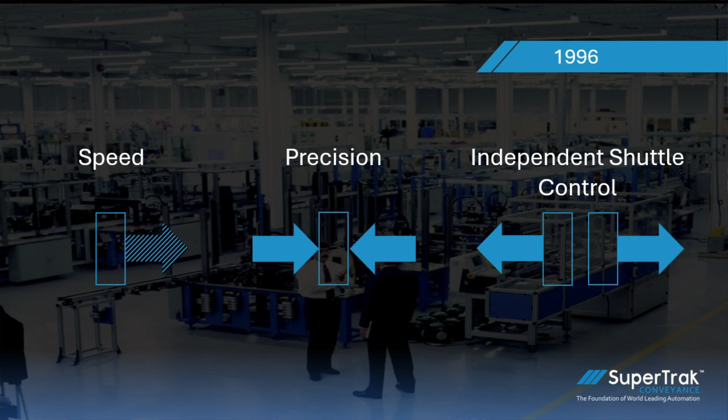And if we could have independent control over each shuttle, basically controlling its destination, its velocity, and its acceleration, that would open up immense possibility for machine designers. At the time, we started looking at what was available on the market.

And if you look at something like an indexing dial, with an indexing dial, you get speed and precision, but you sacrifice independent shuttle control. With something like a pallet conveyor, you get independent shuttle control, but you sacrifice speed and precision. And those solutions are good for lots of applications, but the more complex an application gets, and the more widespread that application gets, it starts to become a burden on machine designers.

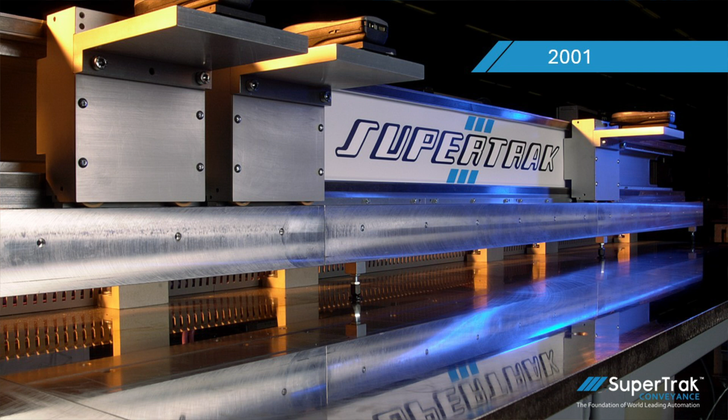So we started to develop a solution. And this is where SuperTrak begins. In 2001, at the Motek show in Stuttgart, for the very first time, we exhibited SuperTrak Conveyance. And this was our show cell. And we were demonstrating how speed, precision, and independent shuttle control can make machines smaller by limiting the amount of tooling and robotics that you need in order to get to a high performance level.

This particular show cell was demonstrating the assembly steps of these very high-tech looking mobile phones that you can see on those shuttles. And a lot of us here remember the days when you would make a call on a mobile phone, you had to pull the antenna out. And that seems like a very long time ago, to me anyway. And it really just showcases how much time, learning, and experience has gone into SuperTrak Conveyance.

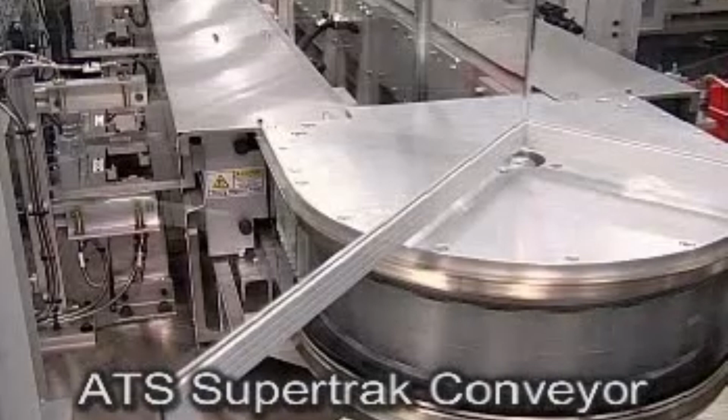In 2002, we released Generation 1 of SuperTrak. And this was one of the very first applications that we did. This was for an automotive components manufacturer. And it was assembling an actuator mechanism. And again, we showed speed, precision, and independent shuttle control can really make a big impact on automation design.

But that's not all automation needs. Manufacturing is dirty. Manufacturing is constant. It's 24 hours, 7 days a week. Manufacturing requires high performance and high quality. And at the end of the day, it needs to run, and it needs to run well.

So we learned a lot about power electronics, about PLC interfaces, about materials for wheels, materials for wear strips. And we also recognized that there were a lot of general improvements we could make to the design. So almost immediately, we started working on the next generation.

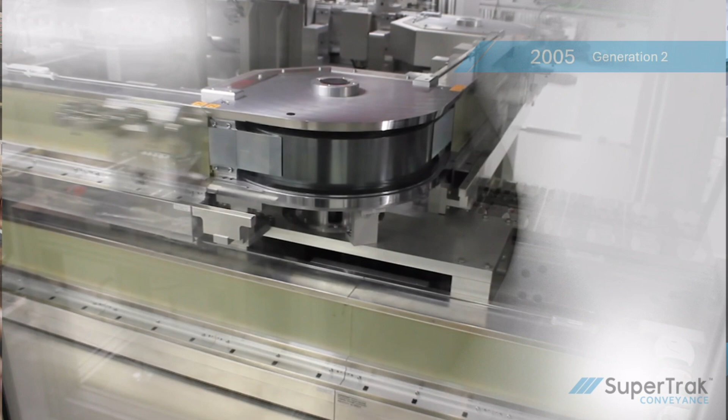In 2005, we released Generation 2. And here we had an improved mechanical configuration, so it was easier to assemble. It was easier to do repair and maintenance. We improved our electronics. That gave us more performance. It gave us a better PLC interface. It gave us more bandwidth on our internal communication channel.

We also recognized that we needed to build more into the software. So our TrakMaster software needed to be more than a simple configuration tool. It needed to have advanced diagnostics, and it needed to have a way to configure functionality. We found that our SuperTrak users were programming the same things over and over and over again. And rather than do that programming each time, why not make that functionality configurable? So this is where we really started to improve the product.

Generation 2 is where SuperTrak really found its legs, and it was a workhorse for us for nearly a decade. We utilized it in medical device assembly, packaging, in pharma, automotive component assembly, in solar, and in battery. But like everything, we also recognized that we could make it better.

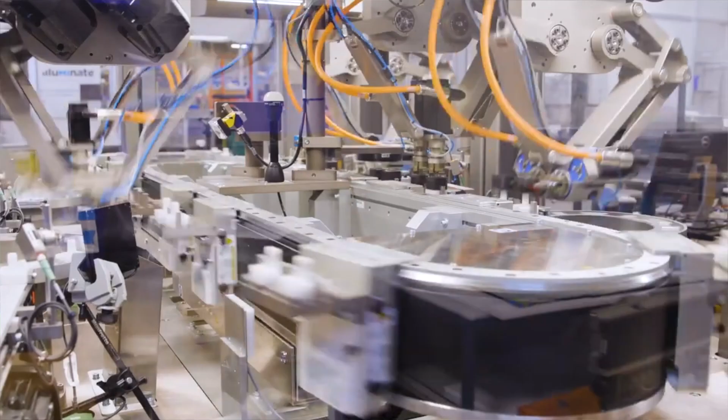In 2014, we released Generation 3, and this is when we could confidently say that SuperTrak Conveyance was an automation platform. Here we introduced a curved linear motor with a precision of plus or minus 25 microns, which meant you could actually stop and do work on the corners. We had higher acceleration and higher velocities. We had best-in-class precision on our straight sections at plus or minus 10 microns.

And we really started to improve the software. We had better simulation tools, better and easier ways to configure an advanced system, and very, very powerful diagnostics. So when things went wrong, you could get back up and running very, very quickly.

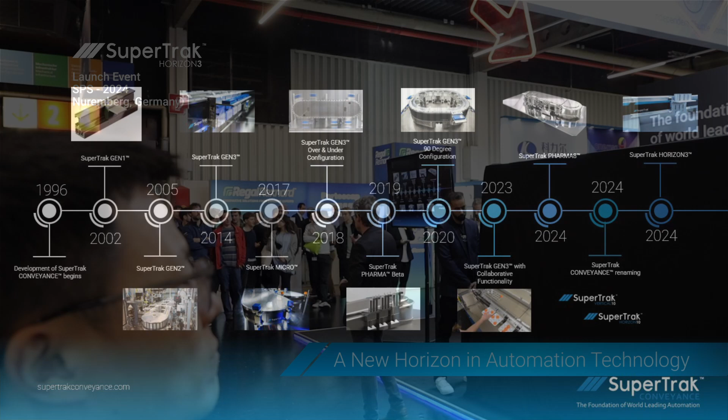From 1996 to 2024, SuperTrak went from being just an idea to an automation platform. But it was really the journey, the learning, the experience, and the time that we put into it that gives us the confidence to call it an automation platform. And since 1996, we've continued to innovate the product. We've continued to enter new markets, new industries, and new applications, looking for ways to show how speed, precision, and independent shuttle control can really make a big impact on machine design.

Today, we're going to introduce our latest product, HORIZON3. And I'm going to pass the microphone to Michael Healy, our Vice President of Products and Technology. Mike? Thank you, Ben. As Ben said, my name is Michael Healy. I'm the VP of Technology for SuperTrak, and thank you all for coming today.

I think the takeaway message from Ben, and the one that we wanted you all to have, is everything that we do here at SuperTrak is all based on a real depth of experience and knowledge. We've been doing this for a long time, and we know what we're doing. But we also know that the future ahead of us has a lot of challenges.

I'm a 24-year veteran of the custom automation business, and the challenges we've been facing in the industry over that time have been tremendous. Some of those that we've seen are the complexity of the products we're trying to manufacture on our platforms is growing. The number of devices, the size of these devices, the processes required to assemble them are more difficult. People, we don't have people to run the lines anymore. We need automation that's smarter, that can do more in less space.

We have problems with decreasing life cycles. We're building machines now while products are still being designed. They have to be agile and adaptable. Sustainability is a huge problem to a lot of people, including us. Reduction of costs. Always about reduction of cost. How do we drive cost out of the product?

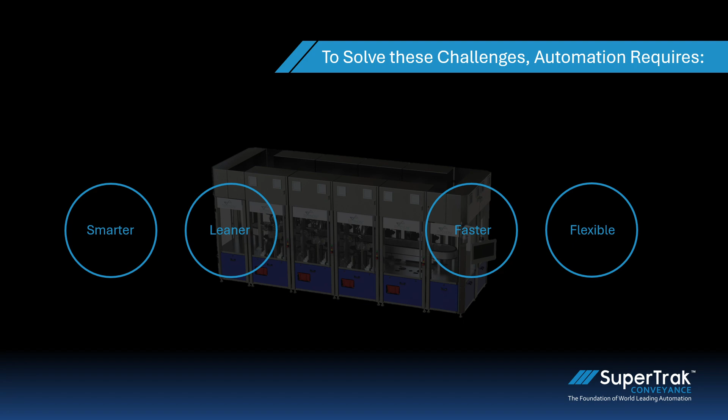Number 3, how do we move faster? How do we increase the output per square meter on the manufacturing floor? And the last one is how do we become more flexible? How do we be adaptable and agile as product and processes change?

So we here at SuperTrak reflected on those questions, and we took the 1,200 systems that Ben talked about, the 20,000 kilometers. We took 25 plus years of experience. And as a machine builder, we went out and we reviewed this with all those in the world. And what we believe is we've developed a product that lays the foundation for the factory of the future.

And I want to say it's not only on the surface of what you've seen, and I ask you to come up later and ask some questions, but the underlying technology here, we believe, won't solve just the problems of today, but will solve the problems going 10 years into the future. So without further delay, I'd like to introduce everyone to what we believe to be the most elite and world-leading platform in the world.

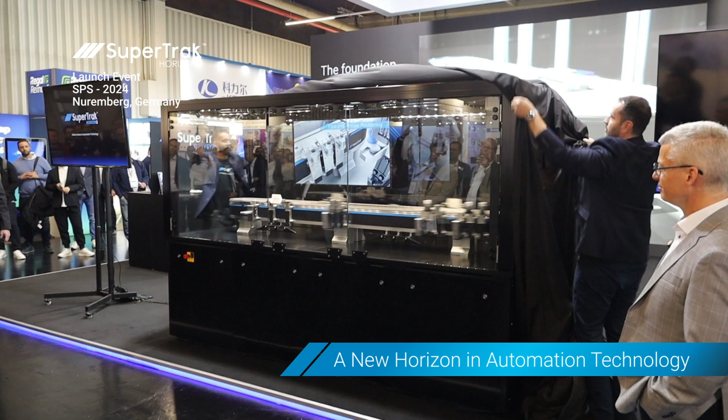So before we move on, I'm going to hand it over to Albert to give you some of the technical features of the product itself. I want to make 2 acknowledgements. First is to the development team, a lot of whom are here today looking like proud parents as we've unveiled this. Thank you for all your dedication, your hard work. This has been a year and a half in development. What they've done in a year and a half is absolutely tremendous and industry leading.

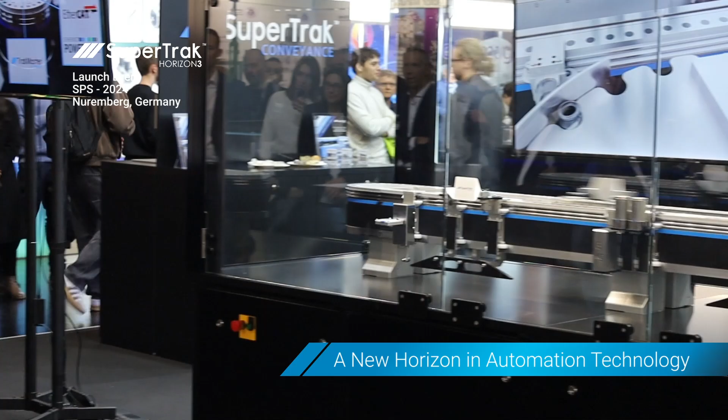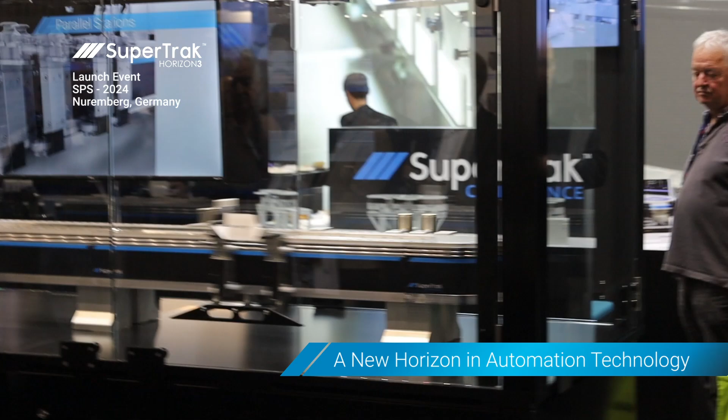And number two, I'd like to thank our early adopters of our technology, and specifically Siemens, who's here with us today to celebrate. They put a lot of effort in, and what they're doing to integrate this into their TIA framework is absolutely outstanding and world class, and I ask you all to go over to their booth and have some discussions with them too. So on that note, I'm going to hand it over to Albert to give you a bit of the technical depth. Okay.

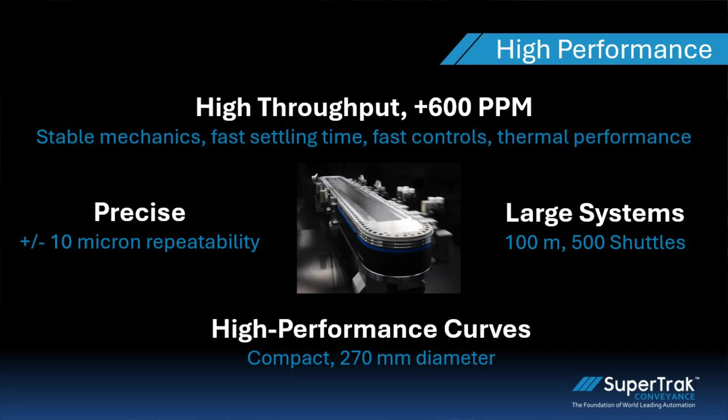And the technology, you get very high throughput with a product like the SuperTrak. And to get high throughput, you have to have very stable mechanics, you have to have very fast settling times, you have to have very good thermal performance, you have to have very fast controls. It takes a combination of a lot of things in mechatronics to really get high throughput. And at ATS, on high precision assembly machines, we push over 600 parts a minute on the SuperTrak platform.

Also very precise. You can position pallets to plus or minus 10 microns, which really lets you use this product for some very, very complex processes. The new system will also scale up to very large systems up to 100 meters of track and 500 shuttles, all on one single system. And also the new compact curve, it's only a 270 millimeter curve, but very high performance. Very good precision, very good acceleration. You know, you can really leverage that corner to do some very good processing.

Also flexibility. So the product now is a 50 millimeter pitch. Over the years, we would often put multiple parts on a shuttle, but now you can go down to one part per shuttle. So a true batch size one. Also on SuperTrak, it's a cantilever design, so you get full access to the part. Full bottom access, full access all around. So that really gives you a lot of opportunities in your automation.

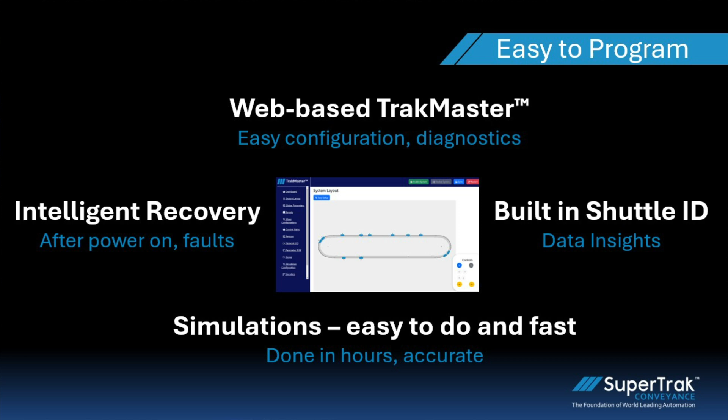Also, with this product, we leverage asynchronous and synchronous motion throughout the machine, whatever is best suited for the process. So definitely total combinations of asynchronous and synchronous areas all combined on one machine. And shuttles on the product can be pulled off or added anywhere very easily. And the product's also very easy to program. The new TrakMaster is now web-based, and it's very easy to configure, and you get very good diagnostics out of the software. Also, the system comes with a built-in shuttle ID. You no longer have to add an ID system onto the track. It knows the unique number for every single shuttle right from production built in.

And also at ATS, we spent many years, like I said, we're a user of the product, so we put a lot of time into recovery. When you open a door, when you move shuttles around, the software will always put shuttles back to where they left off and get you running again very efficiently. So recovery has been a huge area of development in the SuperTrak for many years. And also simulations. You can do simulations very quickly and very efficiently with the product.

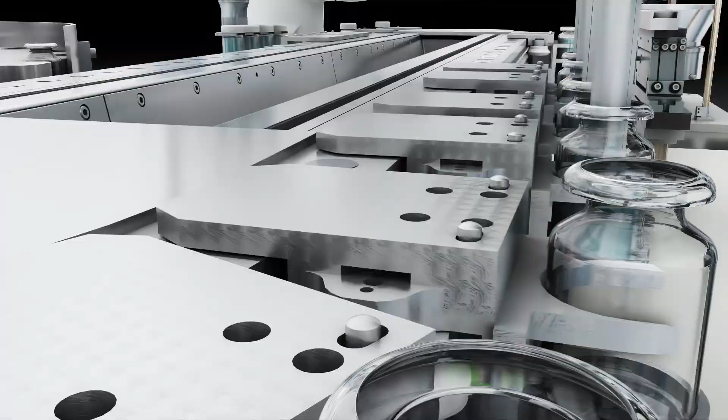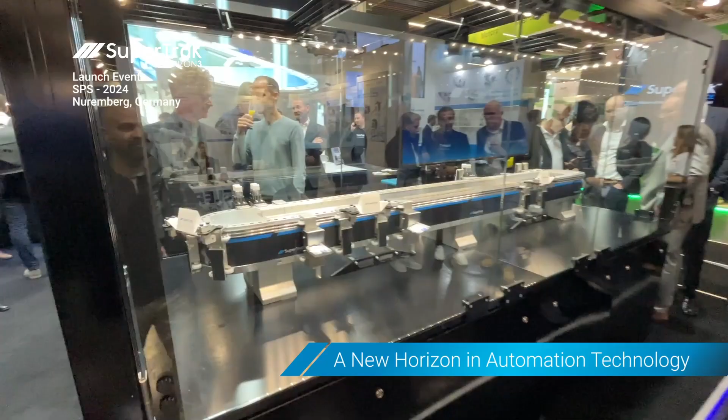And reliable. There's SuperTraks in the field that have been running for over 20 years. And they're totally supported and they're running great. SuperTrak tends to actually outlive the automation around it, and our customers reuse their SuperTraks on the next product, because the only moving parts on a SuperTrak are the 4 wheels on each shuttle. The rest of the SuperTrak stays precise and runs for many, many years. Our customers never have to change rails, ever. The only thing that ever gets changed are the wheels. So you can use a SuperTrak for many decades.

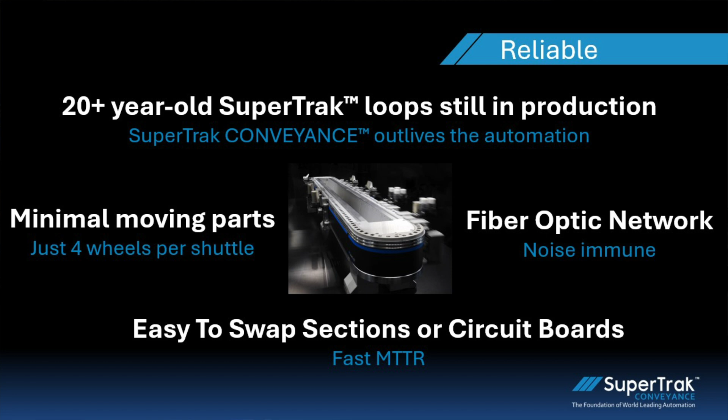And we've added a fiber optic network within the product, which is completely noise immune and very high bandwidth. So now the SuperTrak has within it, it's all fiber optic communication. And it's very easy to swap motors. That's another improvement we made on the latest product. Very easy to pull out a complete section and replace it. Also very easy to pull out a circuit board and replace the circuit board.

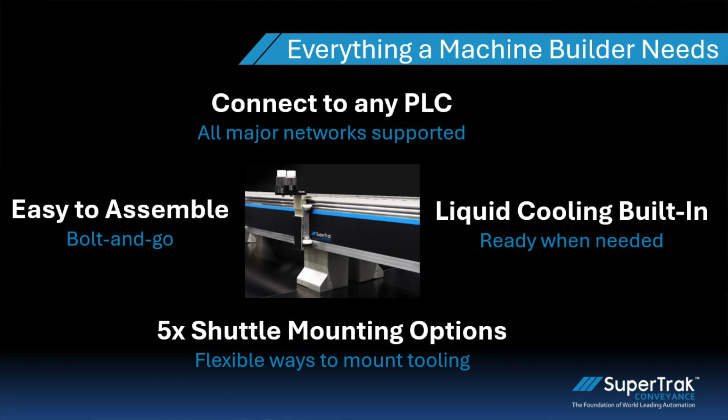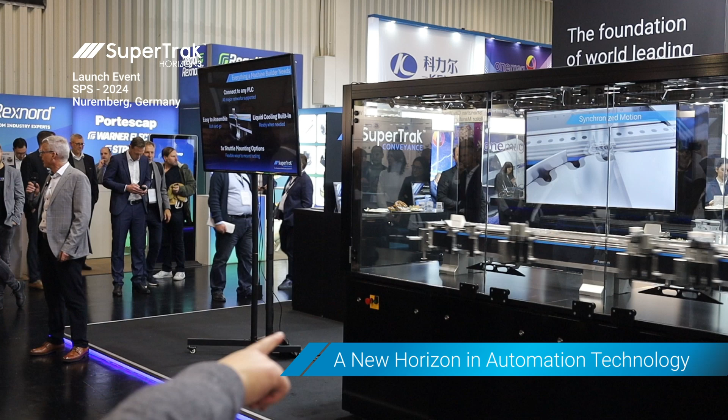And really, like I said, we really focus on what machine builders need. This product integrates with any PLC. It supports all the major networks, very strong integration with any PLC. It's very easy to assemble. You bolt it together and you go. The product has pipes in for liquid cooling. So if you have a very high performance station, it's very easy to add liquid cooling. We also added a number of different mounting options on the shuttle. Again, just to give you a lot of flexibility, how you mount your tooling to the product.

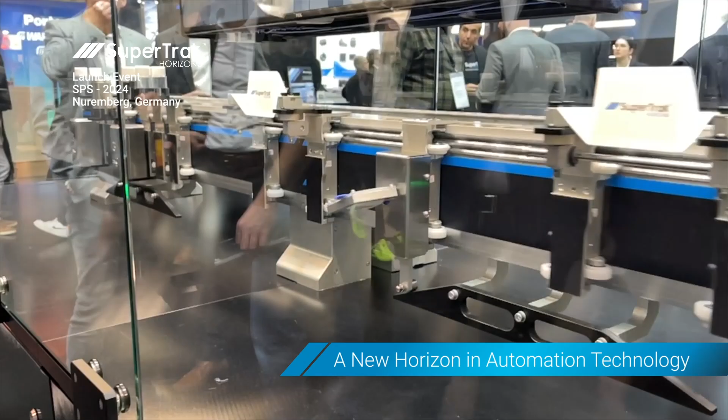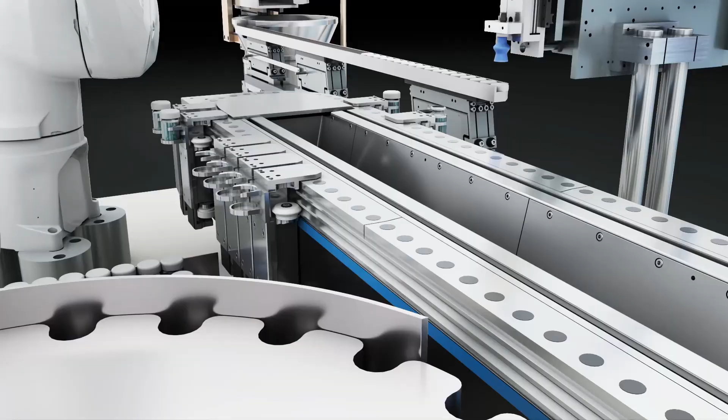And like mentioned, this is really the first true machine integrated conveyance platform. This product can be totally controlled from Siemens TIA Portal, just like a servo axis in Siemens, and that's running at Hall 11. So, we've done a lot of work here to really make this a true machine integrated platform. Yeah, like I mentioned, there's billions of euros of automation running today on SuperTrak, and it's a very, very efficient platform to implement into your machines.

So now I welcome everybody, come on up and take a look at the new HORIZON3. So, let's just